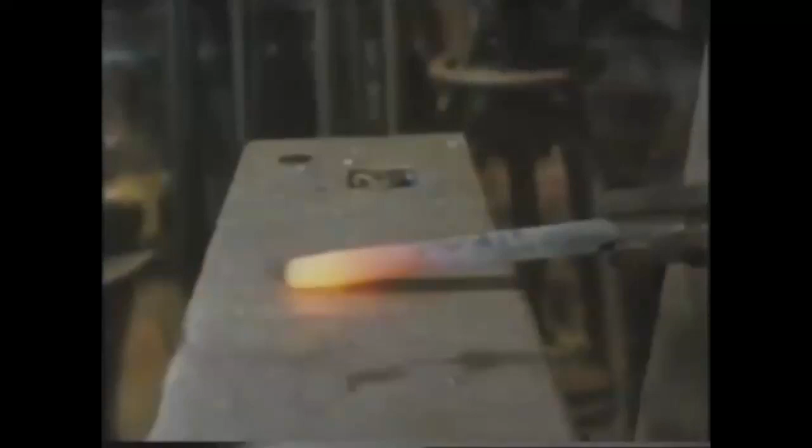When working hot metal, like a steel bar, it's very important to remember that after shaping, it's by no means fit for the job. Take this chisel. It's being forged into shape by a traditional method. But before the chisel can be used, it must be heat-treated. This is done by heating it and then quenching it in water.

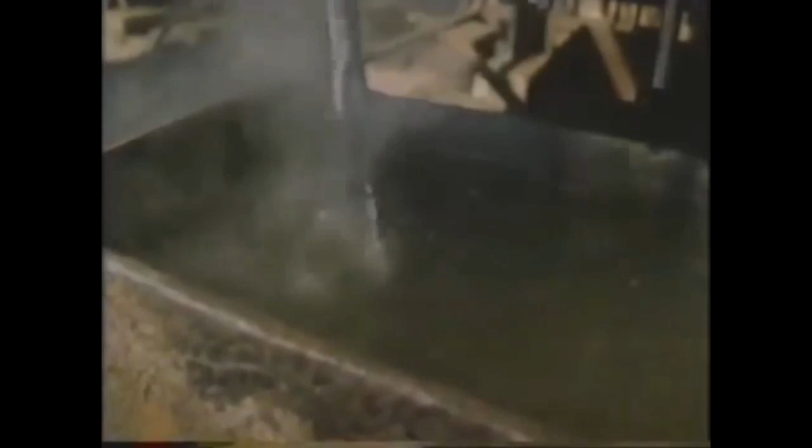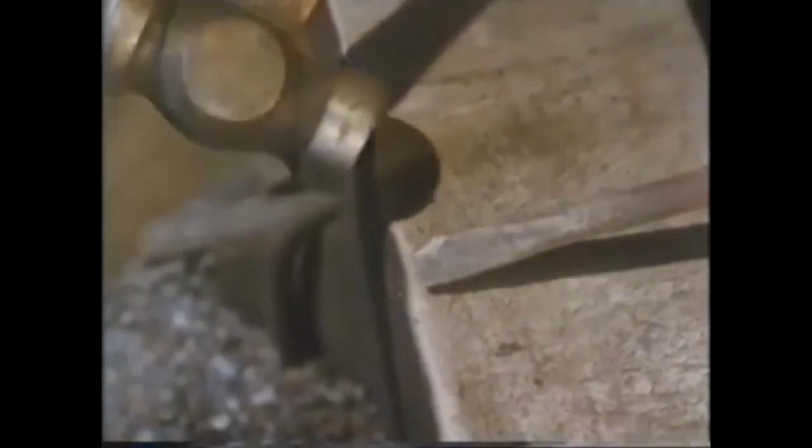This hardens the chisel, but unfortunately, it'll also make it brittle. So brittle that if it's used without further treatment, it'll break. It needs not only to be hard, but tough as well. It has to be tempered.

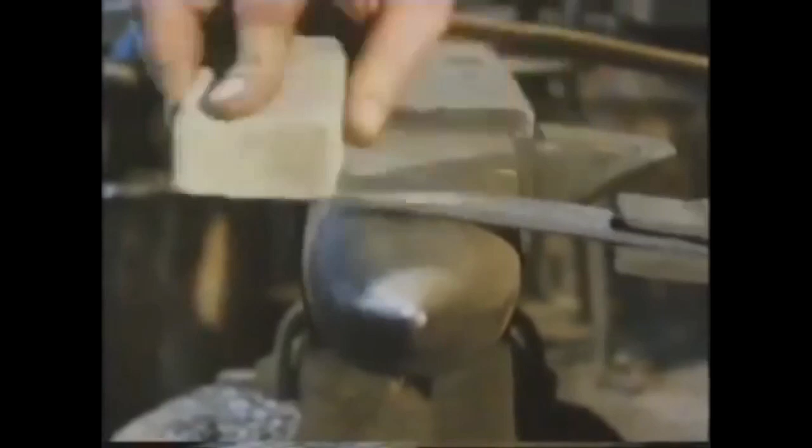To do this, the smith cleans the surface of the chisel with an abrasive paper and then reheats it, this time to a lower temperature. Then he quenches it in water. This makes the chisel less brittle, but it also robs the metal of some of its hardness.

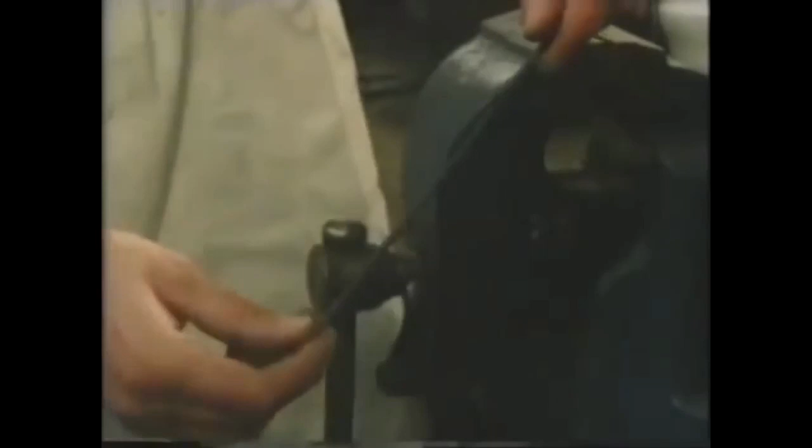To show you what happens, let's look at a small carbon steel rod. The rod can be flexed easily in the hand, and you can see how elastic it is. When the rod is heated in a furnace to red heat, then cooled as quickly as possible in water, it will become hardened. So hard, in fact, that a file won't make any impression on the surface. It'll just skid over it. But unfortunately, the rod has now become brittle.

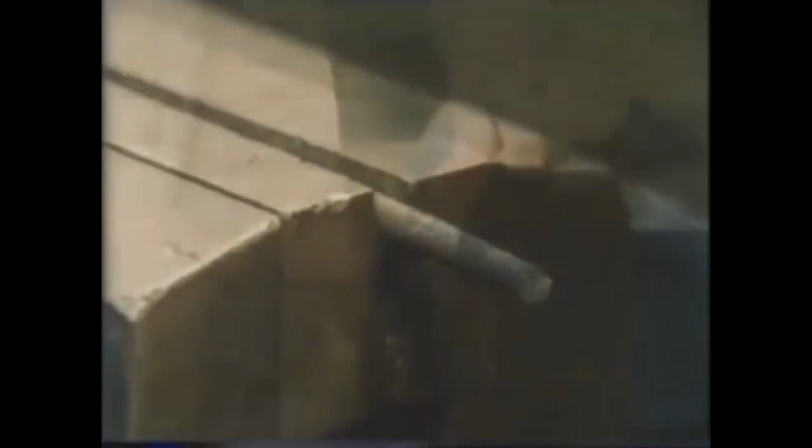In this second experiment, an identical rod is heated in the furnace to the same red heat. Then it's cooled very slowly by immersing it completely in vermiculite, a process known as annealing. The metal will now have good ductility and will be soft. You can mark it with a file with no trouble at all. It'll also bend easily, but after bending, lacking elasticity, it remains bent.

In a third experiment, the rod is again heated to the same temperature, and then it's quenched rapidly in water. That makes it hard and brittle, just as in the first experiment. Then the rod is put back into the furnace, and this time heated to a lower temperature. After this, it's cooled slowly in vermiculite. It could also be cooled in air.

This process of heating and cooling is known as tempering. It's a carefully controlled compromise between toughness and hardness. The rod doesn't mark too easily with a file, and it can be flexed in the hand.

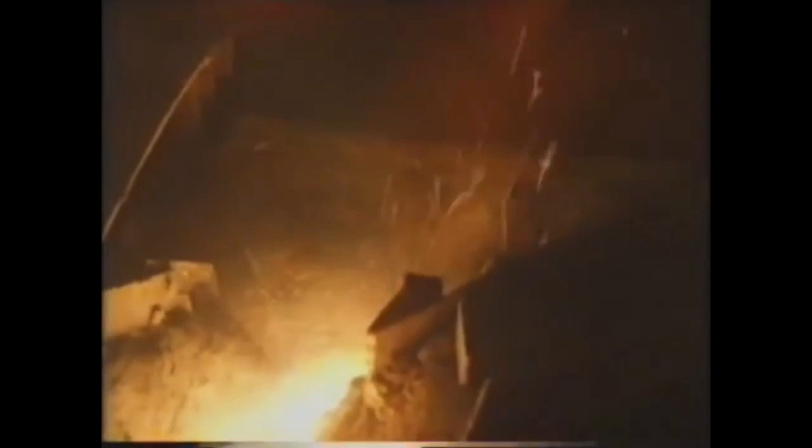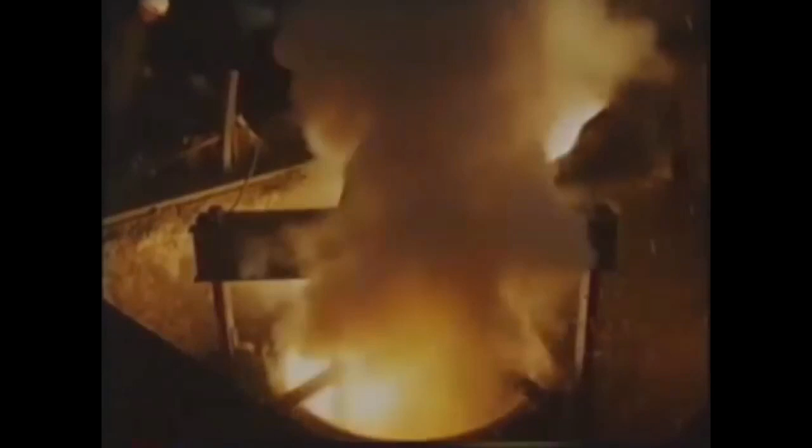The extent to which any steel may be hardened is largely dependent on its composition when it was made in the furnace. The amount of carbon present is most important. Sometimes the addition of transition elements, such as chromium, can also affect its behavior. In fact, adding such elements produces what's known as an alloy steel. But it is the amount of carbon present and the rate of cooling of the hot steel which exercises the most influence.

To understand how the carbon content and cooling rate affect the steel's properties so dramatically, we need to look more closely at its structure. Let's start with that steel rod experiment. Before any heat treatment, it consists mainly of atoms of iron arranged in a body-centered cube. It's called alpha iron. And there are 9 atoms of iron, 1 at each corner and 1 in the center, which we've shaded for clarity.

Under the microscope, it looks like this. Here, there are 2 types of crystals. The rather plain ones are pure iron, ferrite. In the others, the carbon has joined with the iron to form iron carbide, and this combined with the rest of the iron produces a laminated structure looking like mother of pearl.

It's called pearlite. When the metal is heated, it reaches a temperature at which the body-centered cubic arrangement changes to the face-centered cubic type, known as gamma iron. We've shaded the central iron atom on each face of the cube. As the rod is heated and the carbon is taken into solid solution, the laminated structure of the pearlite changes. In this form, it's known as austenite.

The change from one form to the other is easily reversible, from the high temperature, face-centered cubic, to the room temperature, body-centered cubic, from austenite to ferrite and pearlite.

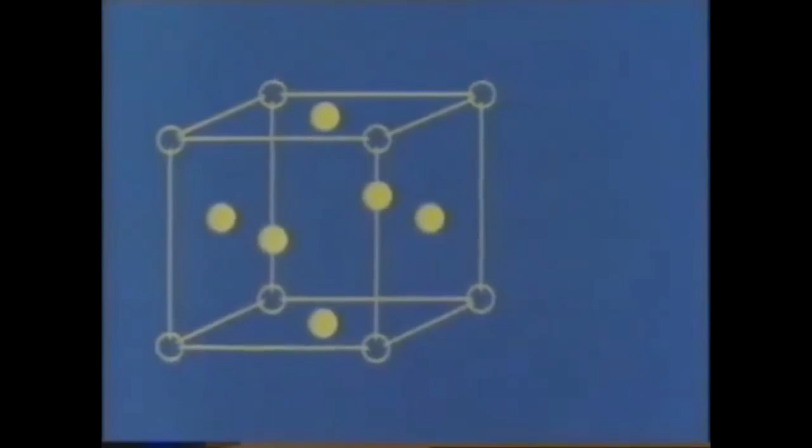Now, instead of cooling slowly, if the rod is cooled rapidly by quenching in water, the carbon atoms have no time in which to come out of the solid solution. The resultant structure can be explained by considering two face-centered cubic arrangements. As the metal cools, it can only revert to a distorted body-centered cubic arrangement due to the enforced presence of the carbon atoms. The structure is known as martensite.

It is this distortion that gives rise to the hardness and brittleness. Under the microscope, it looks like this, with its characteristic needle-shaped crystals. In practice, few steels are used in this extremely hard and brittle martensitic condition, and the reheating of the rod again to a lower temperature, tempering, removes some of the brittleness, yet retains much of the hardness.

What's happened in the tempering process is that a small amount of carbon from the distorted arrangement has been allowed to come out of the solid solution. The temperature at which alpha iron, ferrite and pearlite, completely changes to gamma iron, austenite, is directly related to the amount of carbon present in the steel. So, being able to predict when these structural changes occur is of extreme industrial importance.

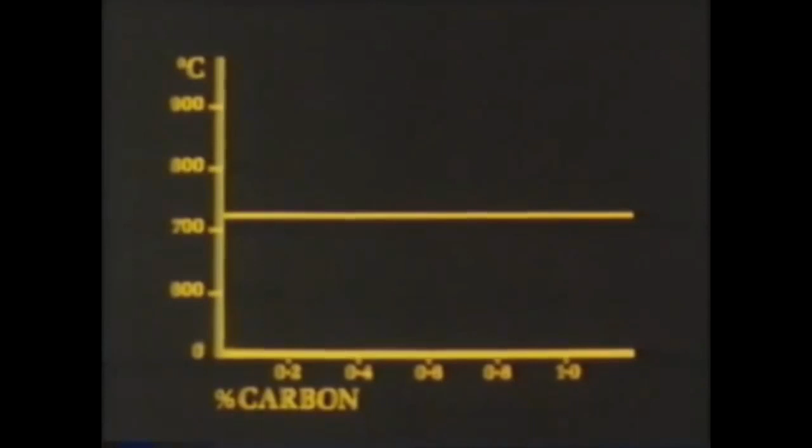If temperature in degrees centigrade is plotted against the amount of carbon on a graph, then, whatever the concentration of carbon, this change begins to take place at 723 degrees centigrade. If the temperature at which the complete structural change occurs is plotted, we can see that it varies according to the amount of carbon present.

As the level of carbon increases, the temperature for the complete alpha to gamma change falls to a minimum of 723 degrees centigrade at 0.83% carbon. At this point, the structure of the steel is purely pearlitic. Above this critical carbon content, the temperature rises again. Joining these points together yields what's known as the iron-carbon equilibrium diagram. Here we've only considered steels with a carbon content of up to 1%, which are the majority of steels used in manufacturing industry.

There are two very important bits of information on this graph. The upper critical point and the lower critical point. In practice, to get a fully hardened structure, the carbon steel must be heated to a temperature just above the upper critical point before quenching, and it must be tempered well below the lower critical point. So, for a given carbon steel, it's possible to predict the limits of any heat treatment process.

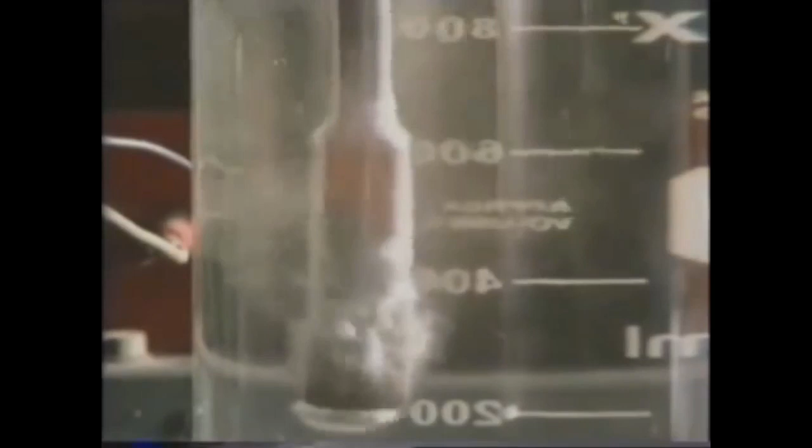As a quenching medium, water is cheap and plentiful. But because it cools the metal so rapidly, there is a danger of cracking or distorting the metal. That's why oil is frequently used. The cooling effect is not as rapid. As a result, the component will be slightly less hard, but the risk of distortion and cracking is greatly reduced.

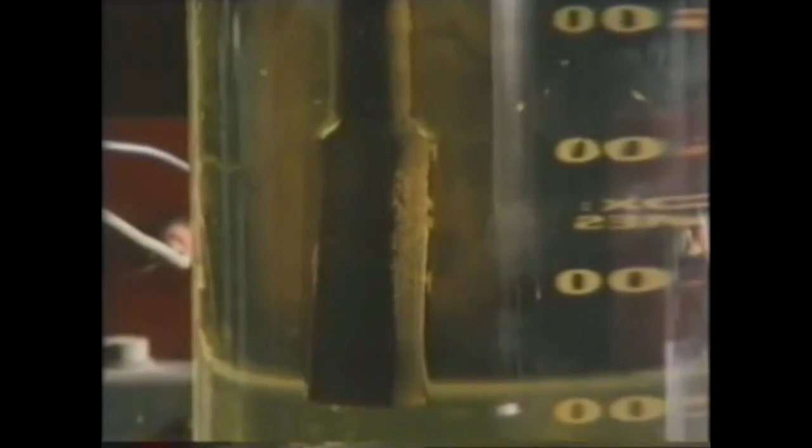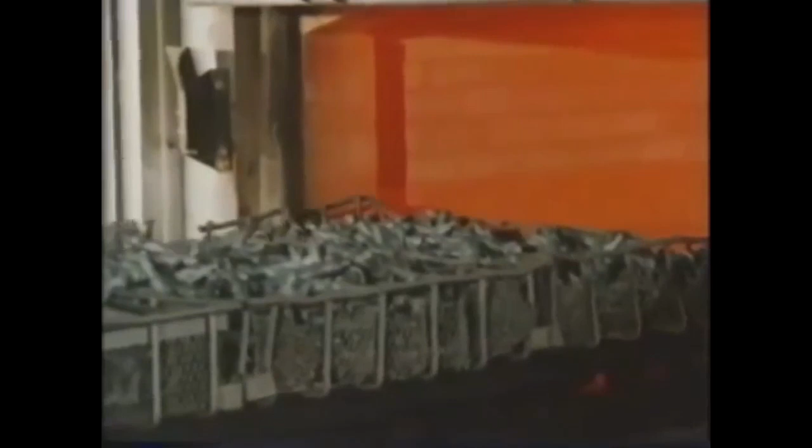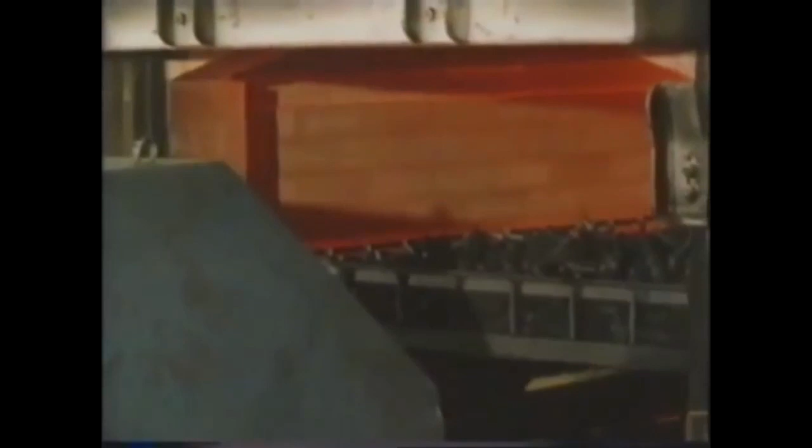These components were forged from a 0.4% carbon steel. Now they're ready to be heat treated. First, they're loaded into a gas-fired furnace and heated to a temperature of 860 degrees centigrade. This is just above the upper critical point for a 0.4% carbon steel. The time they're in the furnace will depend on the number of components and the thickness of the material. These conrod caps will be left in for 1.5 hours.

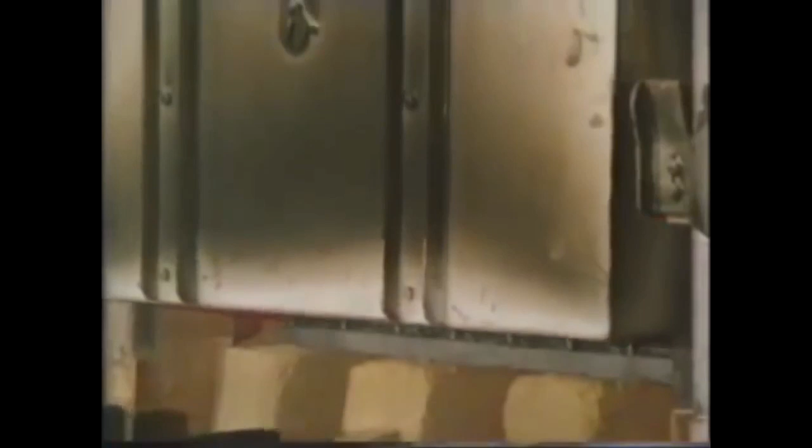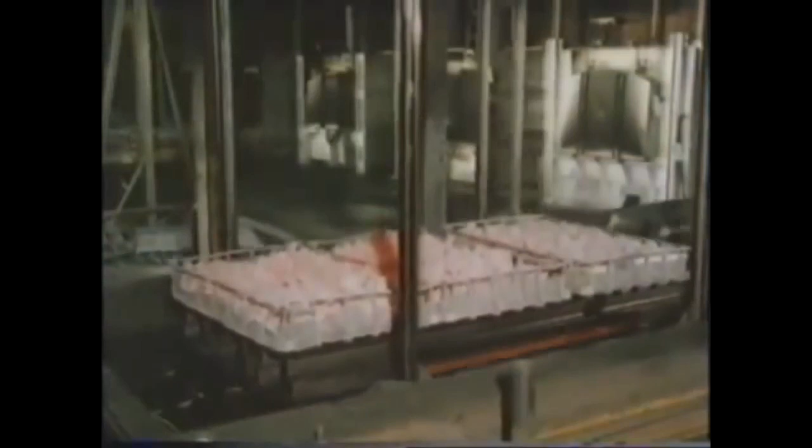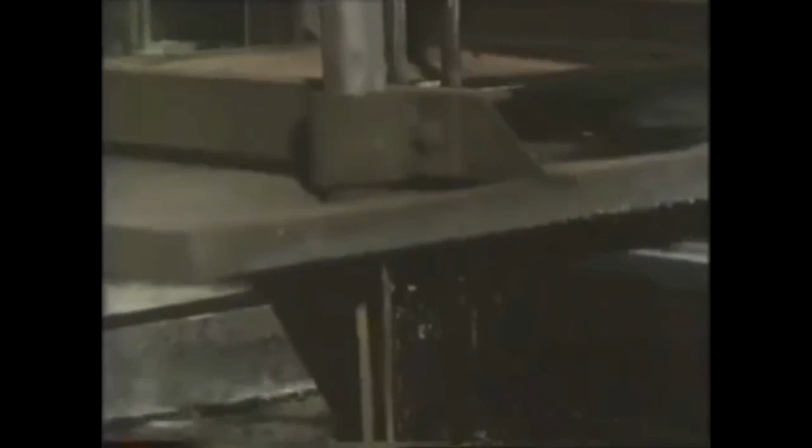After this time, they're taken to be quenched in oil. The conrod caps are agitated in the oil during quenching, and this helps to cool them uniformly. After the surplus oil is drained away, the components are ready for tempering. This is done at a lower temperature, 580 degrees centigrade, and it's well below the lower critical point for a 0.4% carbon steel.

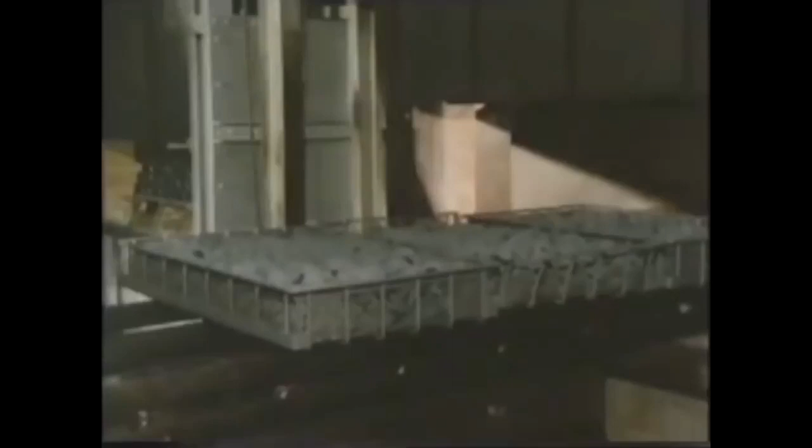After an hour in the furnace, they're left to cool in air. This complete heat treatment process improves the hardness from 229 to 255 on the Brinell hardness test scale.

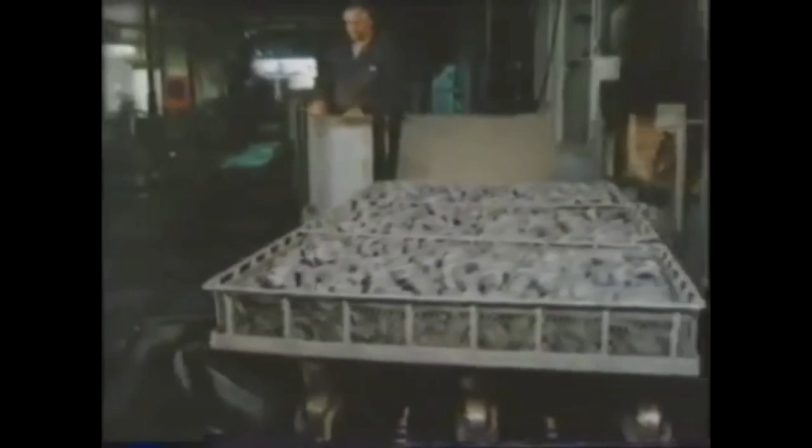Sometimes only part of a component needs to be heat treated. The teeth of this gear wheel require hardening because they are subjected to extreme wear. It's because this steel contains carbon that the theory of the iron-carbon diagram can be used. This technique is called flame hardening.

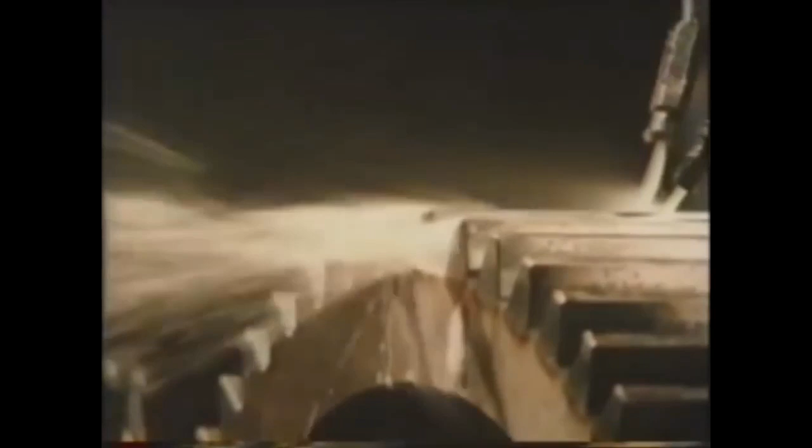A battery of jets burning propane or a gas mixture heats the surface to the required depth. Following behind is a similar battery of water jets, which cool the surface very rapidly. The result is that a layer at the surface is hardened while the body of the material remains soft and ductile.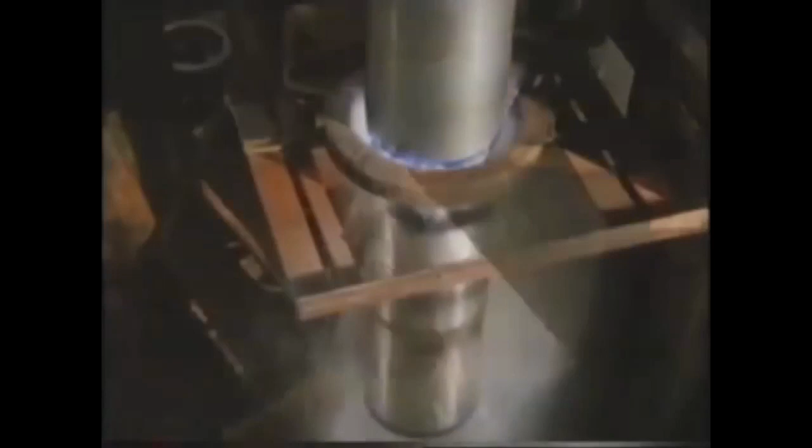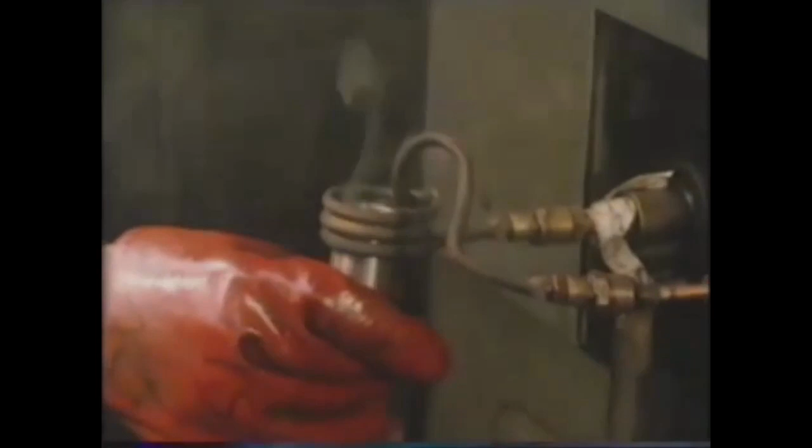Induction hardening is a similar technique. The component is placed into a coil which has been preformed to the appropriate shape and through which an electric current flows. The coil becomes the primary of an electric circuit, with the workpiece acting as a secondary. The heat is generated solely by induction.

The amount of current passed through the coil and the time the component spends in it are adjusted so that the surface is heated only to the required depth and temperature. An oil quench follows the heating, leaving a hardened layer at the surface.

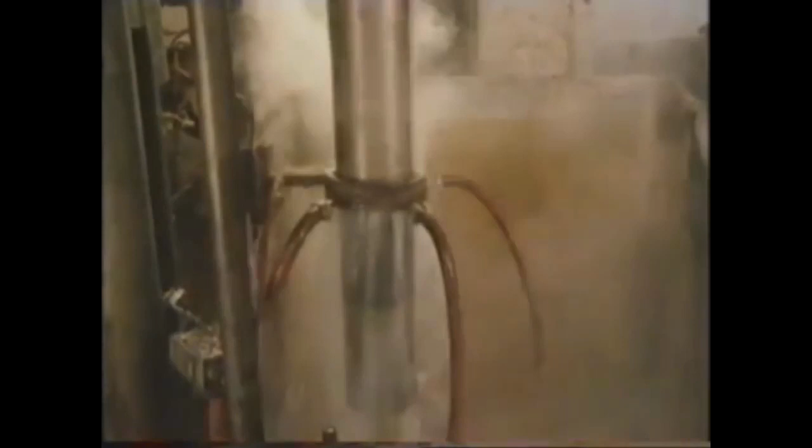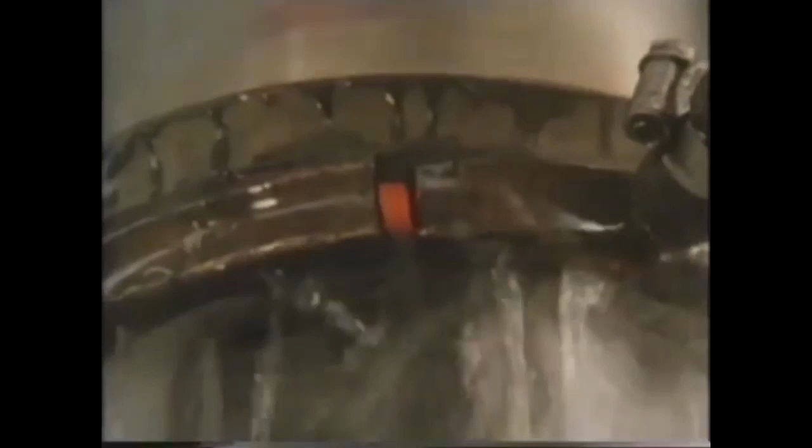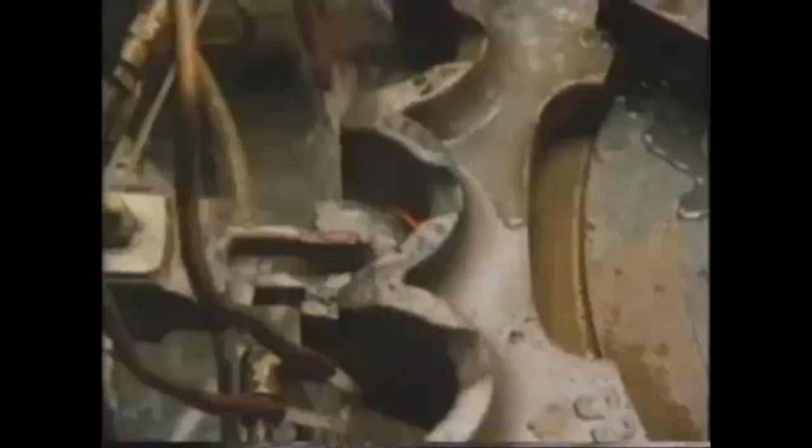Both induction and flame hardening produce high surface hardness on a particular part of a component, and there's less distortion than in furnace heating. A wide range of quenches can be used: water, oil, polyvinyl alcohols, and air blasts. But there are limitations. The components to be treated must be ferrous, and none of the methods are really suitable for very small pieces. In flame hardening and induction hardening, it's usual to follow the cycle by a low-temperature stress-relieving treatment.

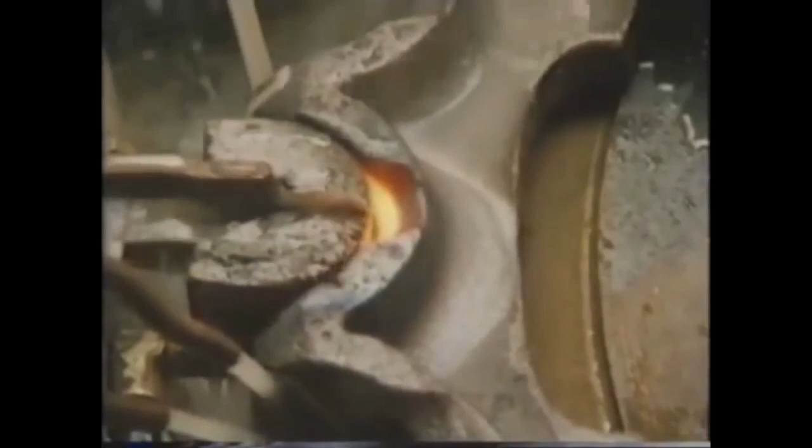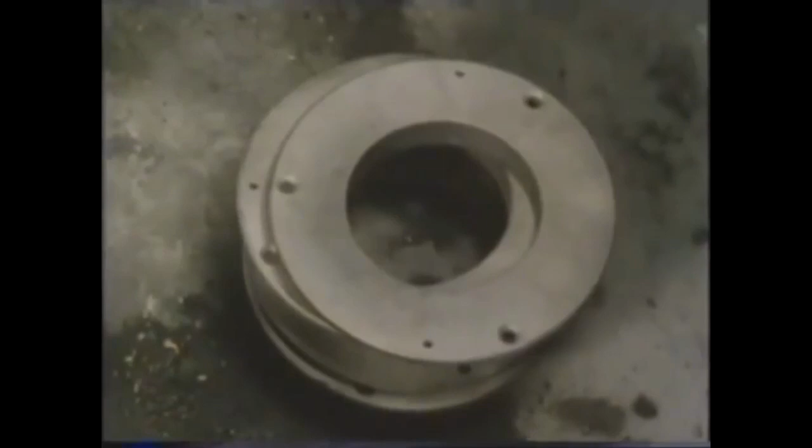If, however, the material from which the component is made contains a low amount of carbon, then the surface can't be hardened by simply heating and cooling. Here it's necessary to add additional carbon to the surface. It's known as a carbon case, and the process is known as case hardening. One of the oldest ways of adding carbon, it's called carburizing, is by the pack method.

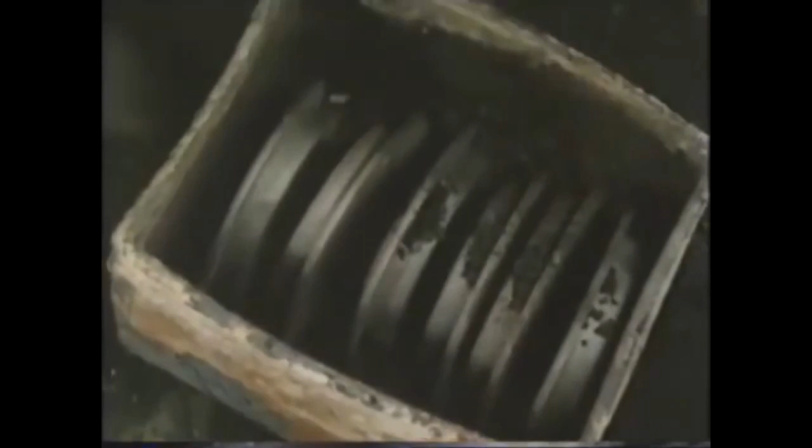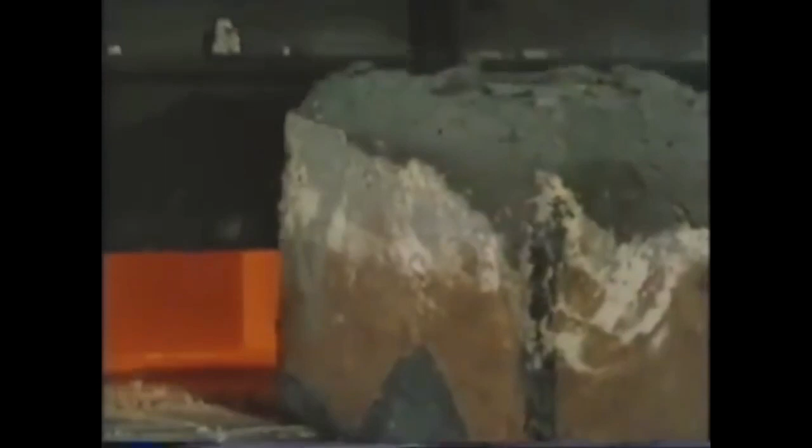Here, mild steel rings are packed together with a charcoal mixture in a box. Then the lid is sealed with fire clay. The box is placed in a furnace at 920 degrees centigrade for some 7 hours. It's worth looking at the iron-carbon equilibrium diagram to see the effect of these conditions on this mild steel ring.

Because carbon has very little solubility in the low-temperature, alpha form of iron, carburizing must take place at a high temperature just above the upper critical point, where the solubility of carbon is greater. As the material is very low in carbon, this means quite a high temperature. This, with the time in the furnace, will determine the depth and penetration of carbon into the surface of the component, as seen in this cold cross-section.

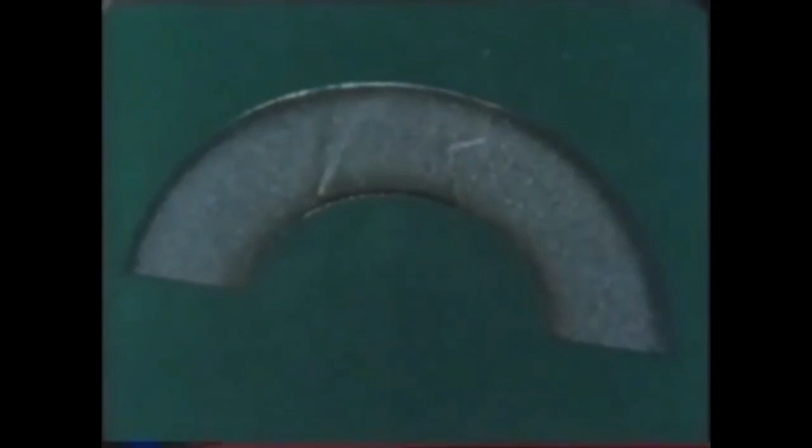But because of prolonged heating at a high temperature, grain growth occurs. The high carbon case will have a coarse, crystalline structure, and it has a tendency to crack under stress. This coarse grain has to be refined, and the case hardened. And this is the next stage in the process.

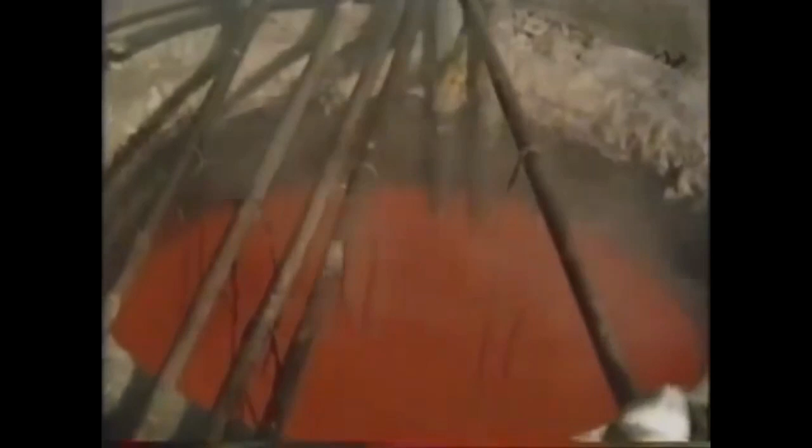After cooling, the rings are heated in a molten salt bath at 780 degrees centigrade for half an hour. The temperature has to be above the upper critical point, but it is lower than the original carburizing temperature, since there's now more carbon in the surface. After heating, the rings are quenched in water. So the case is hard and the grain refined, meeting this particular customer's requirements.

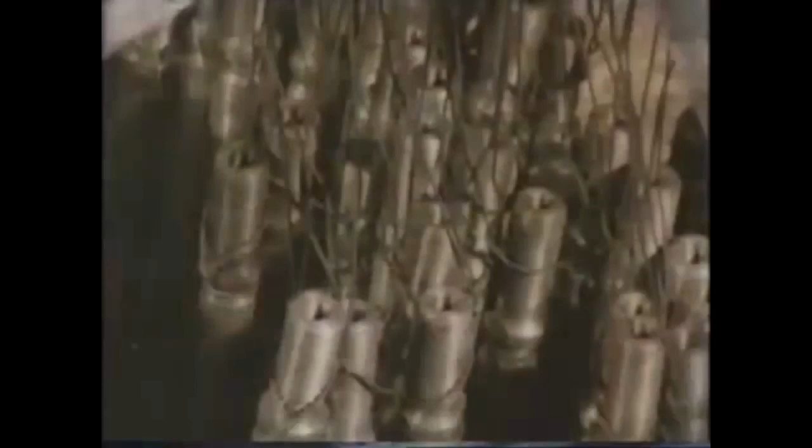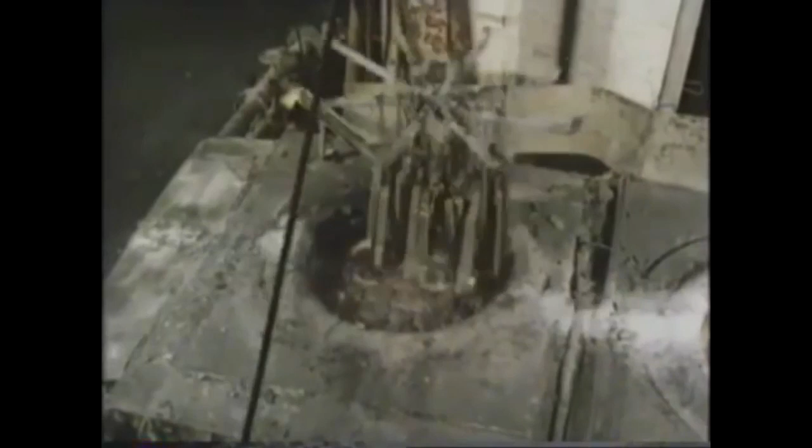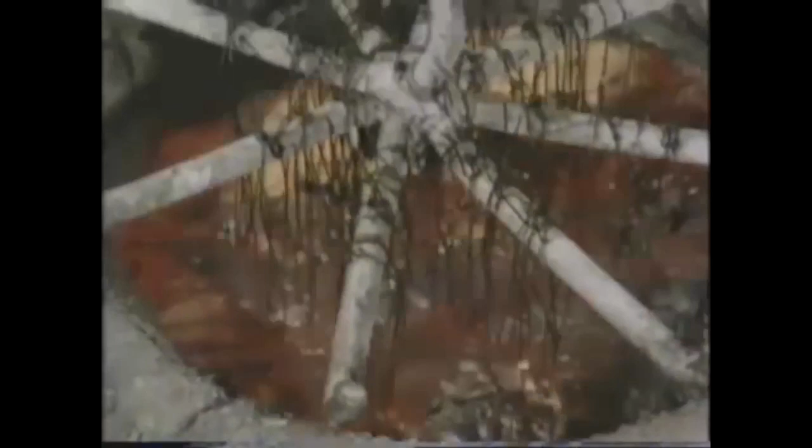It is possible to case harden components without creating such coarse structures. These spindle shafts are made from a low-carbon steel. After preheating, they are carburized by immersing them in a liquid bath of sodium cyanide and sodium carbonate, which also contains a little sodium chloride.

They're left in the melt at 900 degrees centigrade for 1 hour. This is time enough to impart a thin carbon case, but not long enough to produce a noticeable grain growth. After an hour, they're quenched in water to give the required hardness to the surface and a clean finish to the component.

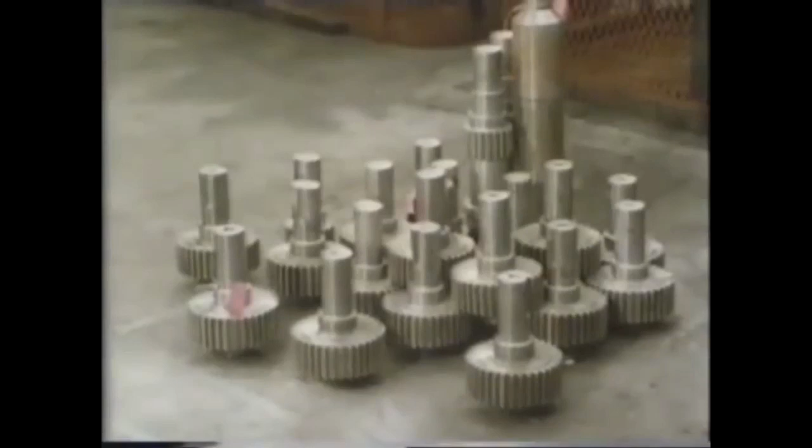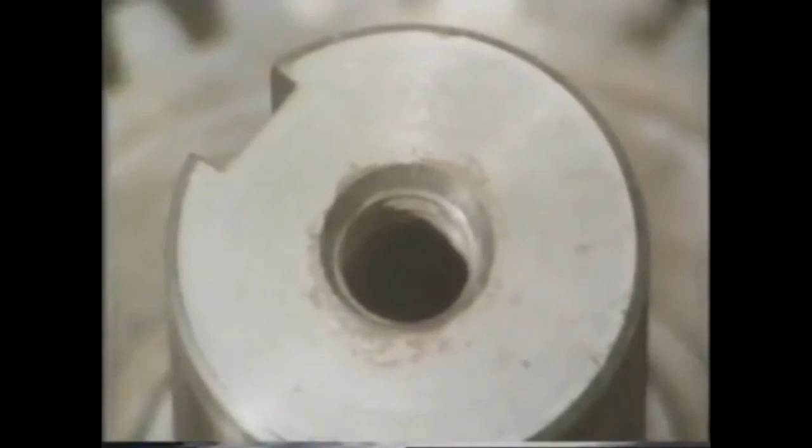Different parts of a component will frequently require varying degrees of hardness. The teeth on these low-carbon steel gear shafts, for example, need to be very hard because they'll have to stand a lot of wear. The core of the material needs to be tough, and the thread that's in the center of the shaft must remain soft so it won't break when used. To prevent any carburizing of this thread, it's blanked off completely with fire clay.

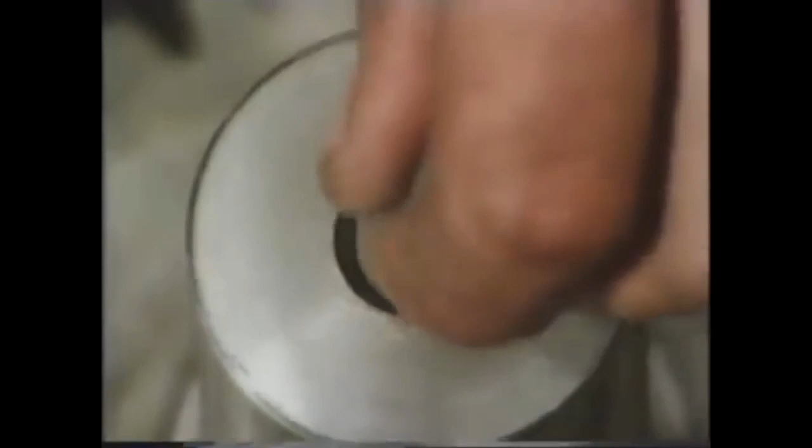The method to be used here is called gas carburizing. In essence, the parts are placed in a furnace, heated to the required temperature, and a carbon-rich gas introduced. Again, the depth of the case will depend on the temperature of the furnace and the time the piece is left there.

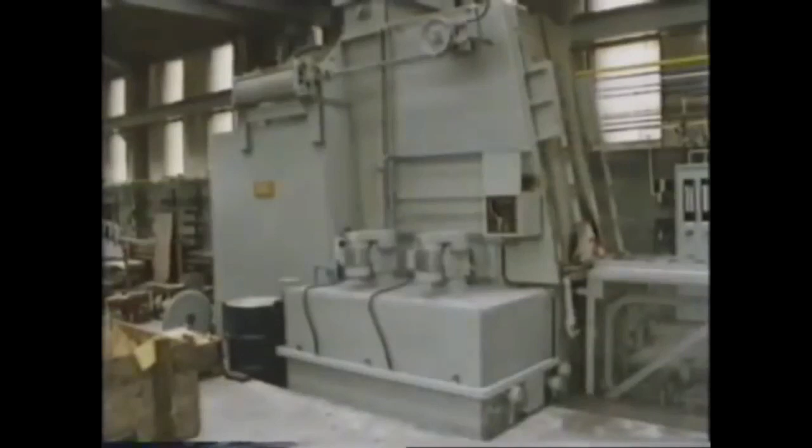The equipment is in 3 parts: an oil quench tank, an outer compartment or vestibule, and an inner furnace. The inner furnace for the gear shafts is at a temperature of 900 degrees centigrade, and it's here that the carburizing will take place. The gear shafts are cleaned, degreased, and loaded in a wire basket, and this is pulled on rollers into the outer vestibule.

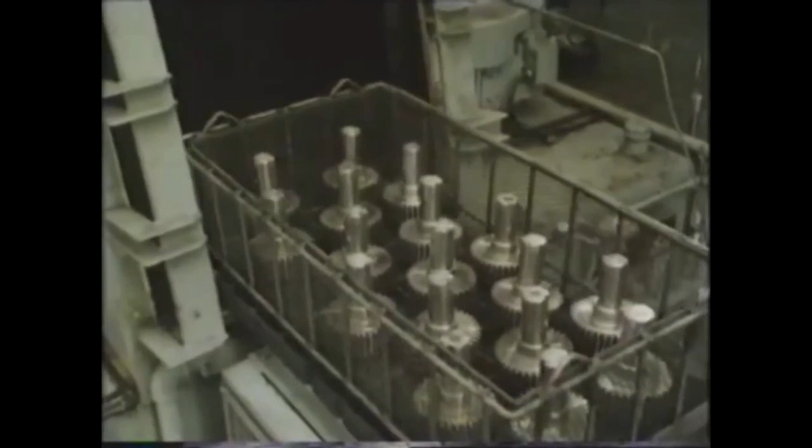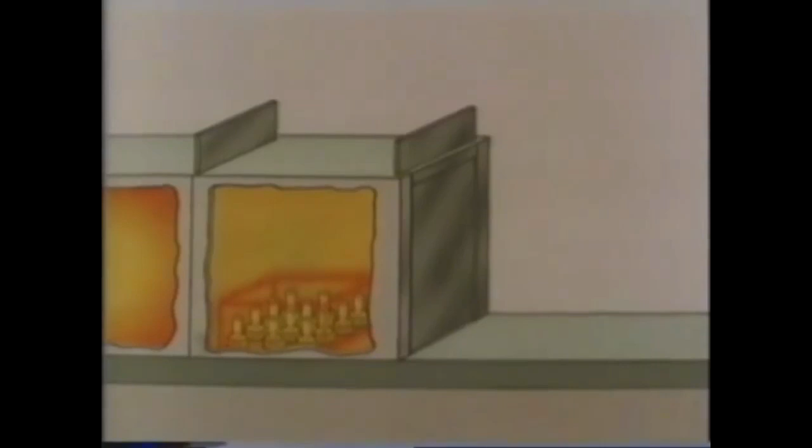Once the door is closed, all the air is purged away and replaced by what's known as endothermic gas. It's essentially a carrier gas and is virtually neutral. It won't add any carbon to the surface or remove any carbon that's already there. It's there solely to carry the carbon enrichment gas.

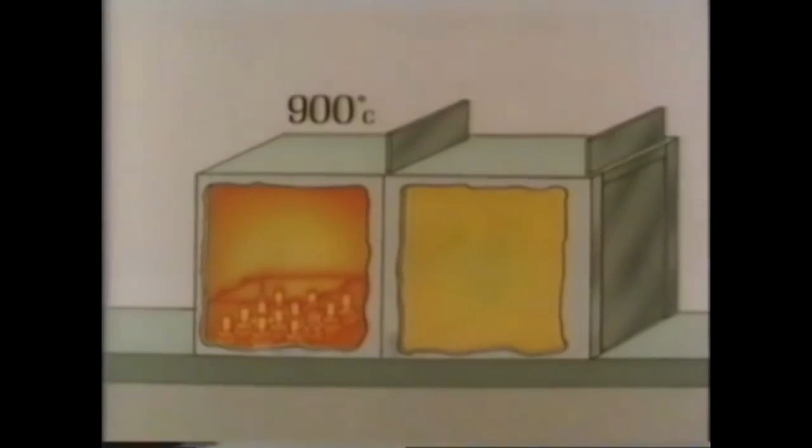This purging takes 15 minutes, and then the tray and its contents are passed into the furnace at a temperature of 900 degrees centigrade for carburizing. The carburizing gas here is a mixture of cracked methane and air. The gas is passed over the components, completely covering them for 10 hours. The case is then carburized to a depth of 1 millimeter, and the surface now contains 0.8% carbon. The original material contained 0.1% carbon throughout.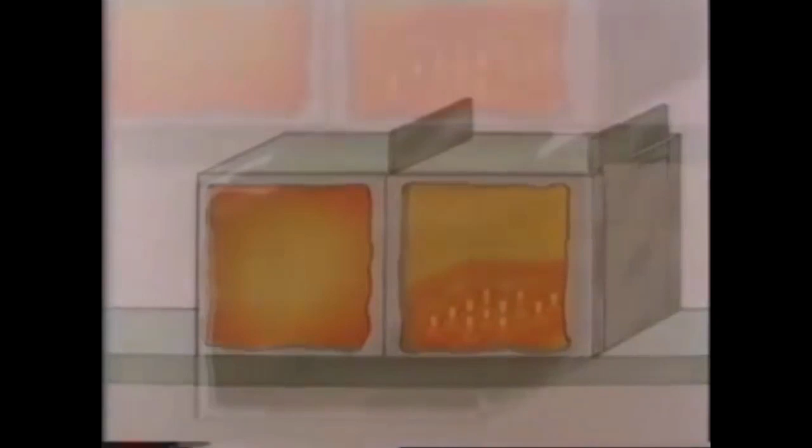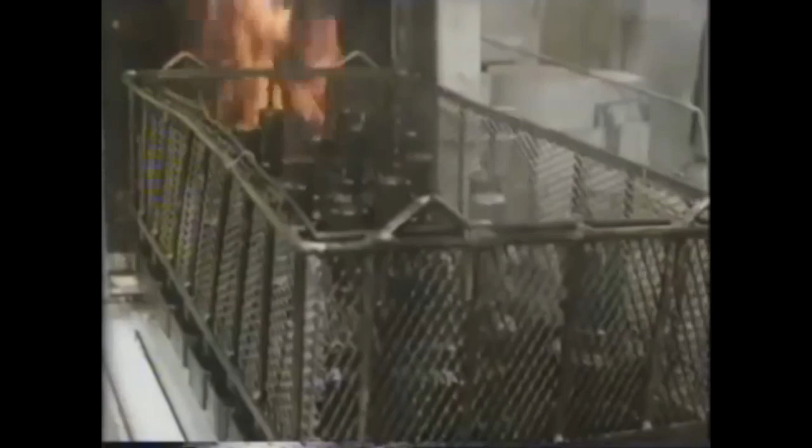The final stage is to refine and harden the case, so it's back into the furnace at a lower temperature because of the higher carbon content, 0.8%. This time it's 760 degrees centigrade for 3/4 of an hour, and then it's oil quenched. This refines the grain of the case and hardens it. The end result is that the gear teeth are hard, the core is tough, and the thread, after removing the fire clay, will still be soft.

The whole system is controlled by a mini-computer. Different sequences for different materials can be programmed by changing the microprocessor.

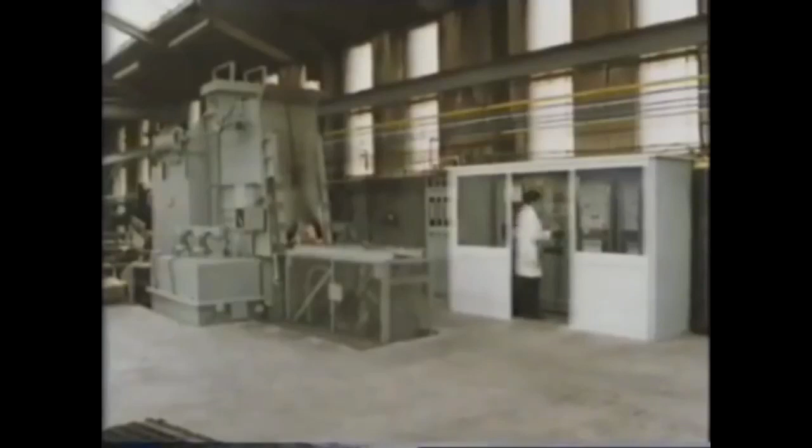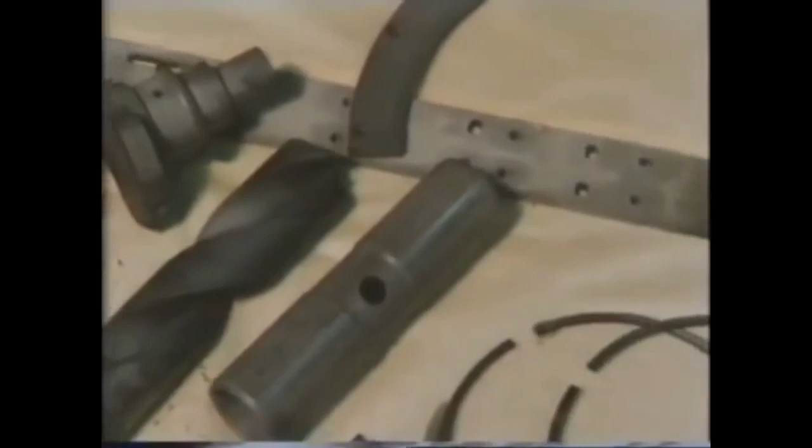Hardening the surface of ferrous metals can also be carried out by introducing nitrogen into the surface of the component. Nitriding resembles carburizing in that the steel is heated for a time in the hardening medium. For carburizing, it's carbon. In nitriding, it's nitrogen. But for nitriding, it's important to have special alloy steels which contain small amounts of metals like chromium and vanadium. The nitrides formed from these metals harden the surface of the steel.

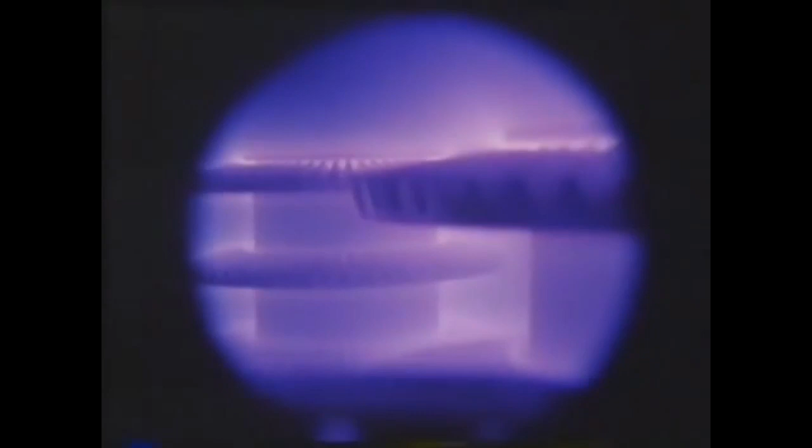One of the latest techniques is called plasma ion nitriding. Ion nitriding is the introduction of nitrogen ions into the surface layer of an alloy steel component under a low-pressure, high-voltage condition. Treatment conditions are accurately controlled to produce, it's claimed, specific structures not found in normal gas or bath nitrided steels. The enthusiasts say that plasma nitriding produces more desirable results than conventional nitriding processes.

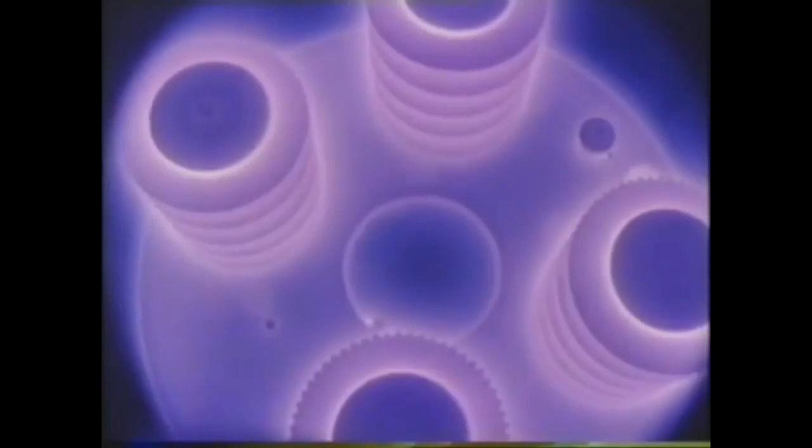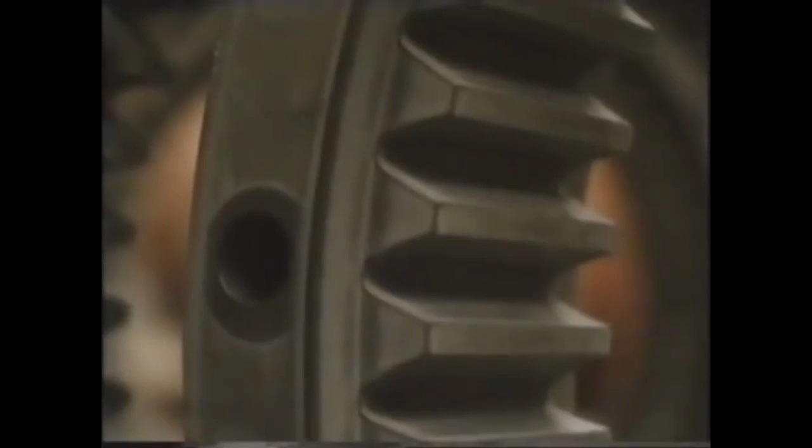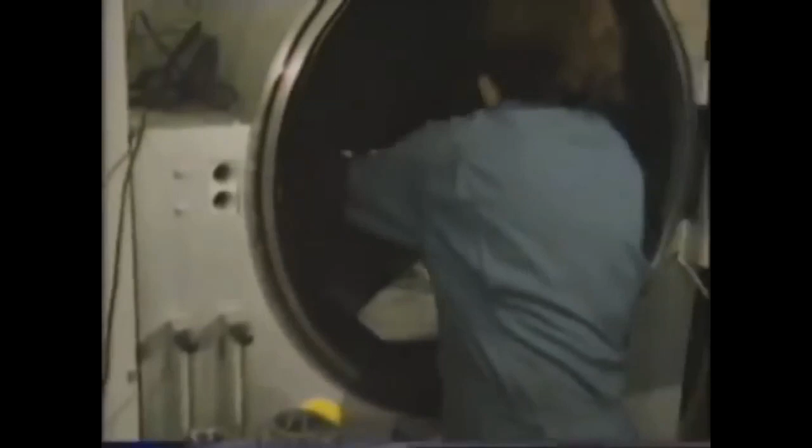The types of components suitable for plasma nitriding are those which have to withstand high wear conditions and yet remain accurate in form. Things like internal and external gears, crankshafts, and rolls for the coal industry. After cleaning and degreasing, the components have to be degassed to prevent localized arcing during nitriding. So they're loaded into a vacuum chamber, which will also contain the plasma. Care is taken to place the components in the furnace so that effective electrical isolation is achieved.

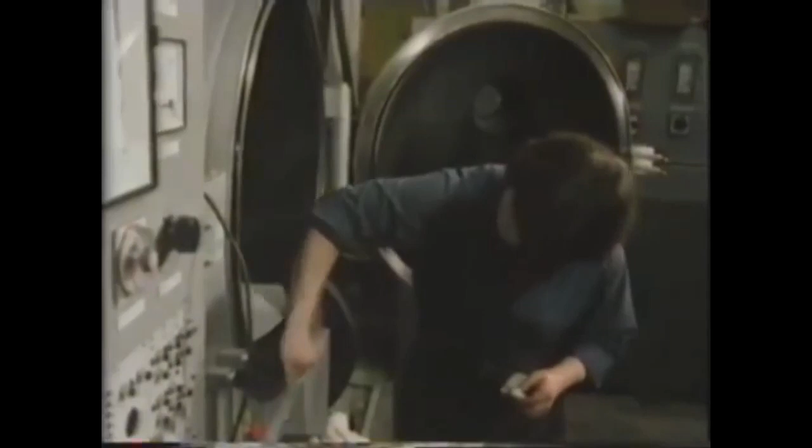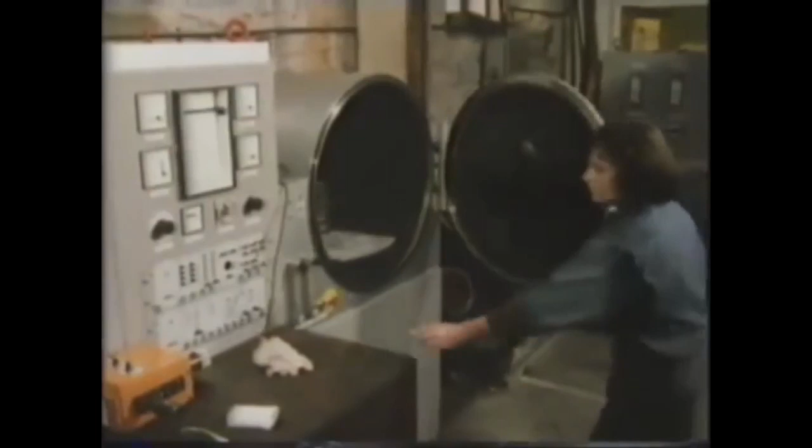Then the seals on the chamber and its door are cleaned and greased to ensure a good vacuum. The process can be carried out using either pure nitrogen or mixtures of nitrogen with hydrogen or suitable hydrocarbons. Treatment times vary between 10 minutes and 20 hours, depending on the grade of steel and the depth of nitriding. The components are connected as the cathode and the furnace walls as the anode.

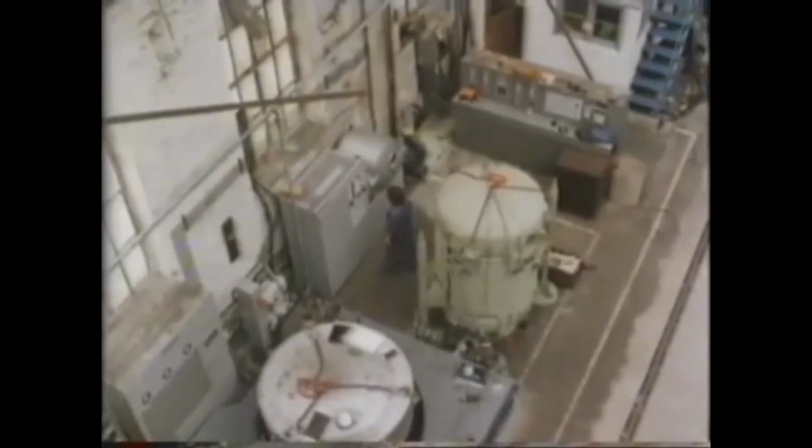Under this potential difference, the molecules and atoms of the treatment gas, in this case ammonia, are excited and ionized, producing a luminous phenomenon known as the glow discharge. The positive ions of the treatment gas are accelerated to the negatively connected workpiece and hit its surface with tremendous kinetic energy. The release of this energy heats up the workpiece, and the ions are occluded into its surface. So the chamber doesn't require a separate heating system.

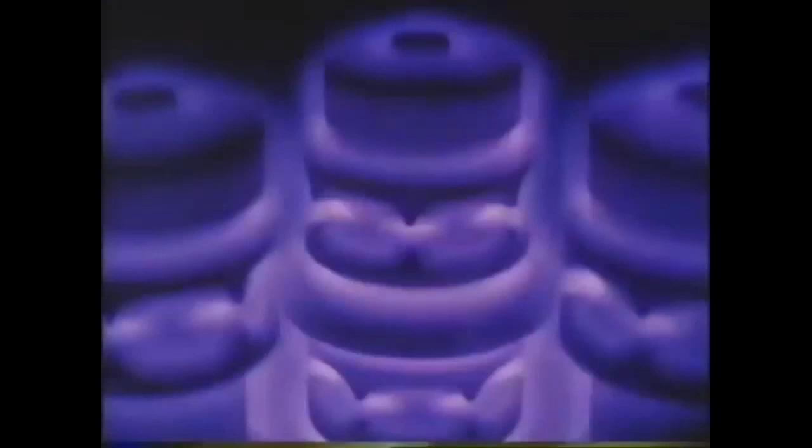The major advantage, it's claimed, is that the structure and grain size of the material remains unaltered, the hardening being caused by lattice distortion and a fine dispersion of precipitates. The last decade has seen many innovations in surface heat treatment, which has led to an improvement in product quality and a more efficient use of energy. A number have been well tried and improved on over the years, while others promise much for the future.